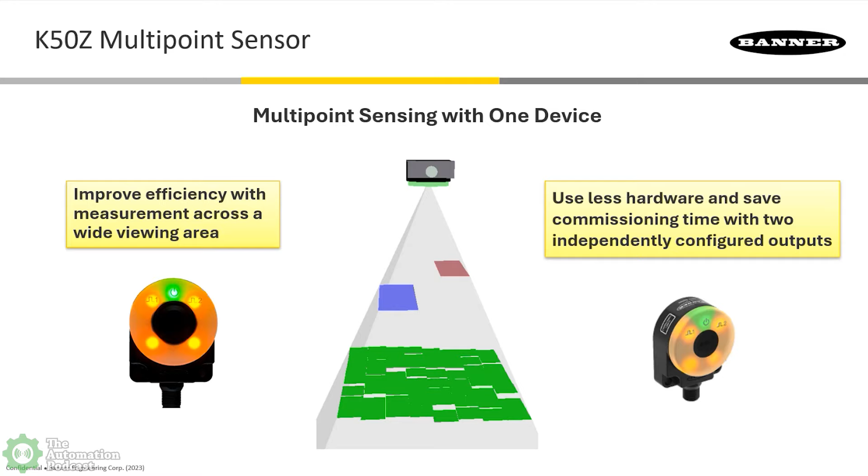No, I just think it's amazing that you can choose any zone in that 8x8 area to look at how far away different things are. Very cool. Yeah, and that area is quite large.

Being able to select zones is definitely one of the key features, but also the fact that it's 45 by 45 degrees coming out of the sensor face out to 2 meters. So you end up with about a 1.6 meter by 1.6 meter cross-sectional area at the furthest distance. So you have a really, really wide view depending on what your targets may be.

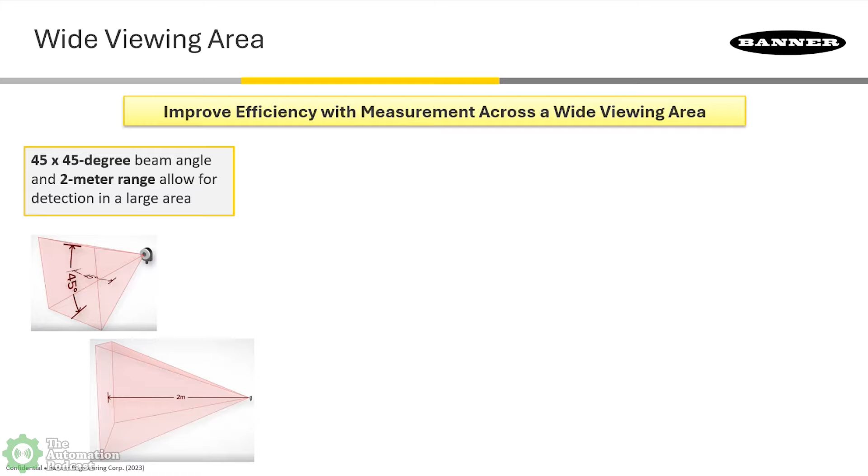In some cases, we've seen the sensor used in filling scenarios where the user wants to monitor the entire contents of a bin, or cart placement where a cart might not be positioned in the same area every single time, or placement of an object where if you're using a single laser or a single ultrasonic sensor, perhaps that detection would be missed. The measurement points as well - the 64 points.

Getting into the grid a little bit before I show too much in the presentation - how the sensor works is it emits an infrared laser out from the face in that large beam angle, and then it waits for a reading back on each individual pixel on an 8x8 imaging component.

Each one of those pixels has an associated distance measurement and an amplitude measurement. The sensor takes those and internalizes them and produces outputs that you as a user, whether it's controls or operations or retrofitting a process or speccing out a new process, can determine where you want the sensor to look. So while we have these 64 points, we provide back useful simplified measurements, and we don't necessarily need to use all 64, but we have the ability to use them.

And lastly, with it being time of flight, it's very resilient to things like an angle of a target. So you won't have signal bounce away off into nothingness as a certain item is presented to the sensor, placed in front of the sensor, like you would have with an ultrasonic. And the pixel density that we have is very reliable in seeing items that would otherwise be difficult to detect.

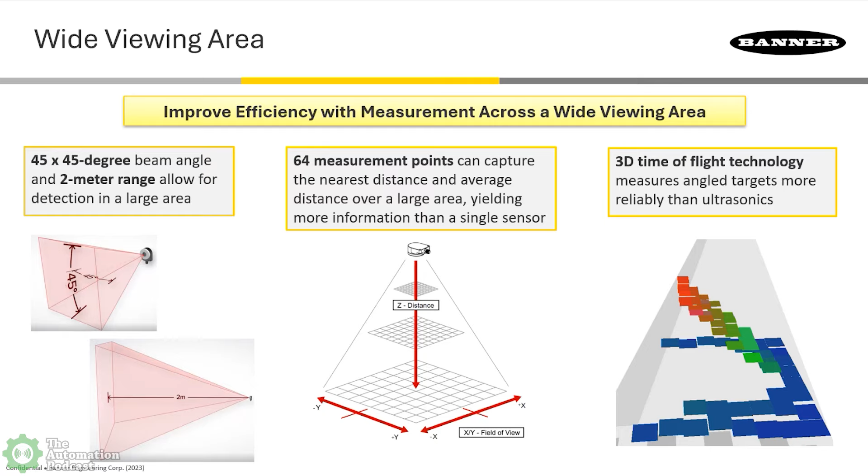Yeah, and actually, they're really well-timed questions, because it segues into this next slide I have. And so when you take into consideration that wide area, there's a lot of data we can access and then tell the sensor to process it one way or another. The fact that we have two outputs and are able to decouple them and have them sense different areas or measure different things is really, really powerful. It sounds exciting when you first hear it, but when you watch it go into an application like you just described, it becomes apparent how much value and how powerful such a small, straightforward, compact sensor can be.

So what this image is showing on the screen is a 3D representation of the sensor and a basic representation of the field of view, partitioned into a left side and a right side, a red side and a blue side. It shows that really what we could tell the sensor to do is focus on a left or a right side. And my mind goes to what applications could that be?

Well, like you said, if I had a bin or a filling application, and at the fill location you get mounding or something, whether it's boxes or other materials, or parts or metal shavings, whatever it may be, they'll accumulate faster in one zone than they will in the bulk of the bin. Being able to monitor those two areas independently - both the fill area where it accumulates faster, as well as the entire area to monitor a true fill level, which we do through an average height measurement - is useful because it gives you the information of whether the area is full or not, as well as whether action needs to be taken to shake a container, or an operator needs to stop by, or some other action needs to happen so that the fill operation can continue uninterrupted.

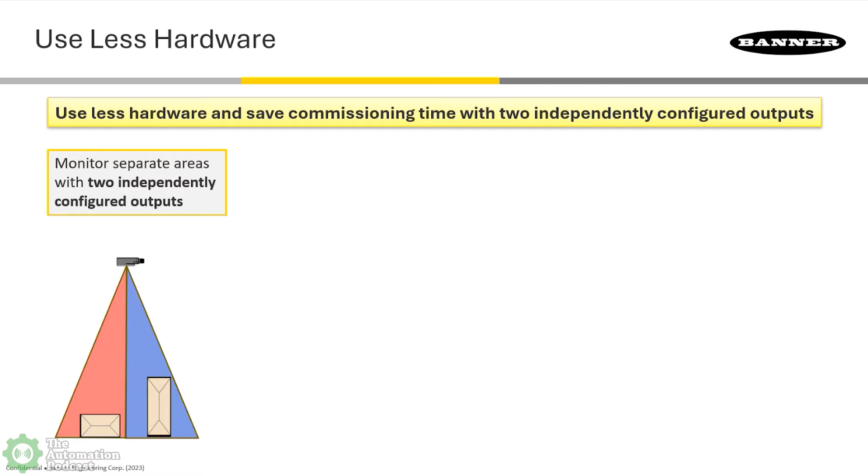So yeah, very powerful. And that configuration isn't limited to just a left and right zone. With the 64 different points present in the sensor, we can selectively go in and turn pixels on or off. The sensor will understand that and use that, and it's very straightforward and intuitive with the software that's free for download from the Banner website.

Really, it's a point and click functionality to set up the different zones. So in the image I have on the screen here, it's two 8x8 grids, each one represents zone 1 and zone 2. I'm telling the sensor to look at a blue zone that has a K and a Z in it, and then a red zone that has a 5 and a 0 in it. So the sensor would selectively only use those pixels for each respective output when making its measurements.

So not just a left and right or a front and back, but truly a very customizable, user configurable sensor to really fine tune it for what the application may be. And I think what's interesting is the fact that you can have the same pixel in both zones, because the KZ and the 50 kind of overlap. They do, yep. They're totally independent of one another, so that doesn't mean they have to be exclusive to pixels. You could have them use the same data.

So you could honestly overlap the two zones completely and measure an average height and a nearest distance, or an overall distance and a nearest distance. So you could get two pieces of information from the same measurement area, and that's just a different application of the two outputs.

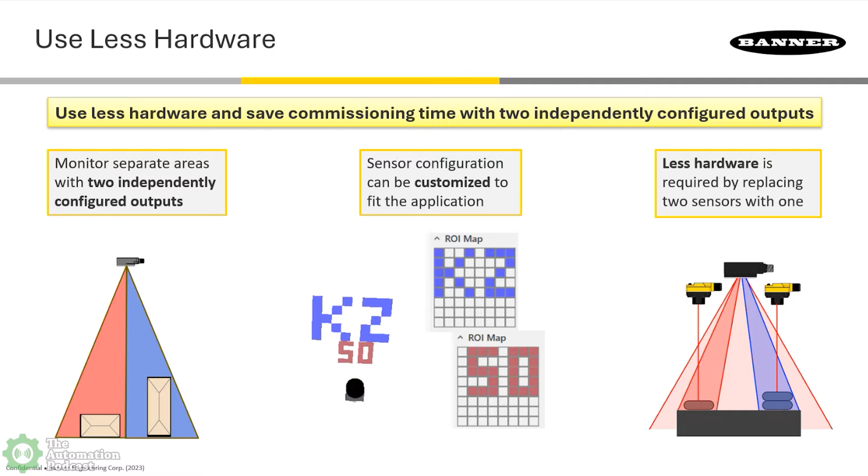Okay, so those are the core presentation slides that I wanted to show, really just highlighting the wide viewing area and the fact that we can customize the sensor so holistically that you can really tailor it to whatever it is that you're inspecting or the area that you're inspecting. And I do have some slides on the software as well, which we can do a live demo of, and I'll talk through it as best I can for anybody who's just listening versus watching the video. But we did develop a software interface just for this sensor, so it's brand new.

It's based on a platform that we use with some of our other products, our radars, and our newest released radar, the Q90R and Q90R2, also uses that same software package. But the K50Z has its own environment and look and feel.

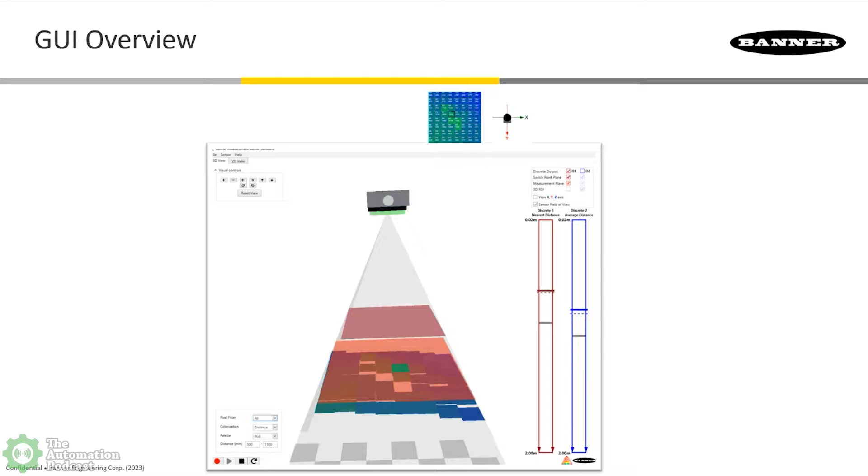Like I said earlier in this discussion, it's very intuitive - feedback we've gotten from all walks of industry, whether engineers, operators, test subjects during development, or internal people, has all been that it's intuitive and easy to use for the amount of data you're getting back from the sensor.

So just some callouts here before I bring up the live demo: we have a 3D area in the center of the screen that we call the observation space. With a 3D sensor, it's more difficult to conceptualize without visually seeing something like this, what the sensor is actually viewing. This gives us a good view into how the sensor is seeing what it's pointed at.

It makes it much easier to configure the zones for sensing in specific areas. We've got a controls interface, and for people out in the field configuring sensors, this was a feature we added specifically for when you're on the floor at a machine, at a sensor, and don't have a mouse readily available. I've been in that situation before, so we got a lot of feedback on that.

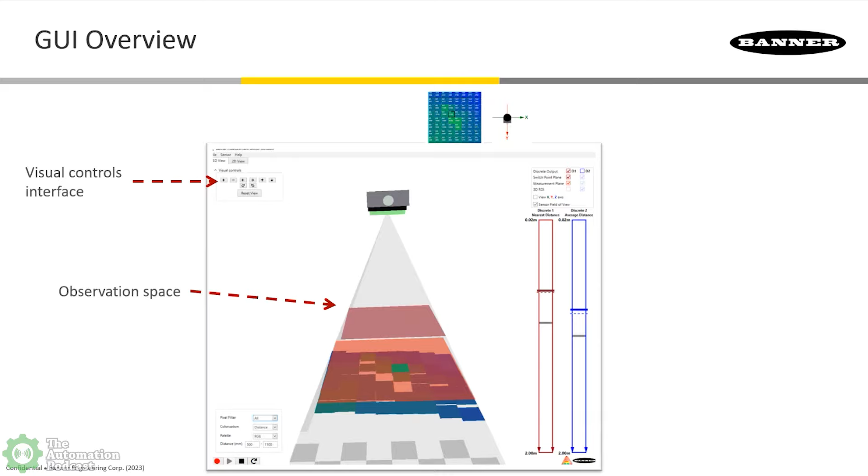So you can navigate around in that space with buttons, versus having to rely on your trackpad to drag and drop and click to rotate that 3D image around.

We've got a few different filters for displaying the actual point cloud itself and colorization depending on distance or excess gain being received by the sensor. There are different display options for how the measurements are being represented.

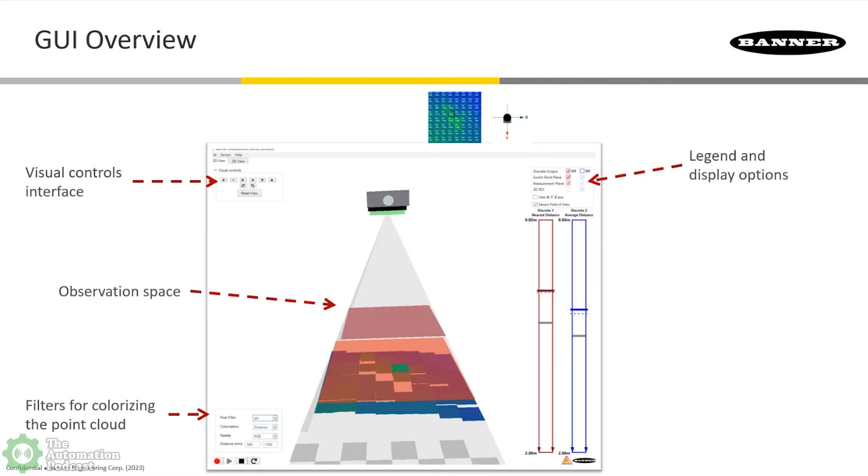Bar graphs, if you'd rather look at the measurement in terms of where your switch point is located and where the measurement is actually occurring. And then the 3D or 2D view - you can either look at the pixel by pixel data as it's coming in, or look in the 3D space and see what the sensor's seeing.

I suppose I haven't mentioned it yet, but now that we're talking about outputs and switch points, the sensor is IO-Link enabled. We provide two discrete outputs alongside that, as well as the ability to pull the measurement data over IO-Link for both discrete output 1 and discrete output 2.

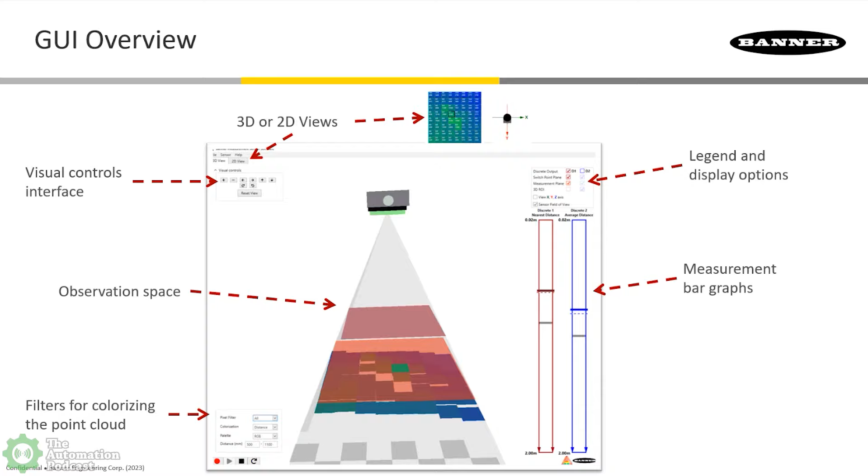So you could either use those as simple discrete signals, or you can make more informed decisions in the PLC using IO-Link and the actual measured value.

Measurement modes - the two modes the sensor can function in are nearest distance and average distance. I wanted to highlight these before pulling up the software itself. What you're seeing is two side-by-side images of the same thing, and the only difference is what measurement mode the sensor's in.

On the left side, you'll see a translucent red plane that's high. On the right side, there's a translucent red plane that's low. I've called out the target with arrows, as well as the floor with arrows. This was just an object I had for testing, placed underneath the sensor, then made measurements on it.

We have this dark red area that we call a switch point plane, and that's fixed in space - it's the distance away from the sensor where your output would either turn on or off. The measurement plane is the translucent red plane, and that moves with the measurement through the 3D area.

In nearest distance mode, the sensor is tracking the closest thing it sees - the pixel closest to the sensor face - and we're reporting back the distance from sensor to the nearest pixel or nearest target. In average distance, the sensor takes all of the data being brought in and averages out the measurement, which is why our measurement plane is now in between the highest and lowest pixels, or the nearest and farthest away pixels.

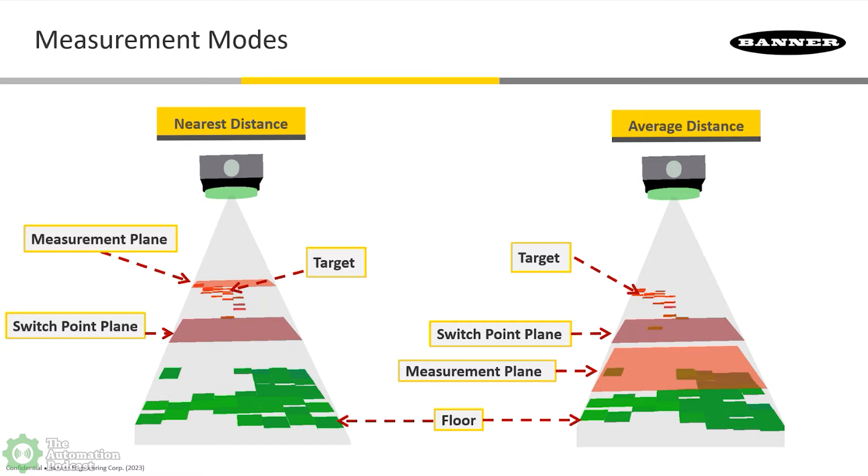I think that slide does, and you did a really good job explaining those two different modes: nearest and average. Nearest would be for just basic detection. Average, think of like you could use it for fill or for accumulation, any sort of application like that.

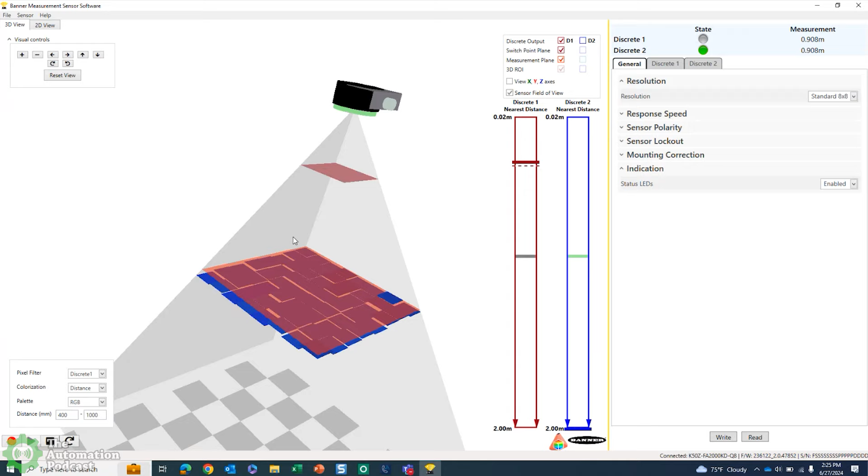So let's go to the software. What we have here is a live sensor that's right next to me right now, just looking at the floor. I'm just going to slowly rotate it around with my mouse, and you can see that we show the entire field of view that the sensor can see, as well as the measurements that are actively being made.

You can see the 64 different measurement points that are coming back from the floor, as well as my switch point plane that's up in the top field of view from the sensor. So it represents quite well visually.

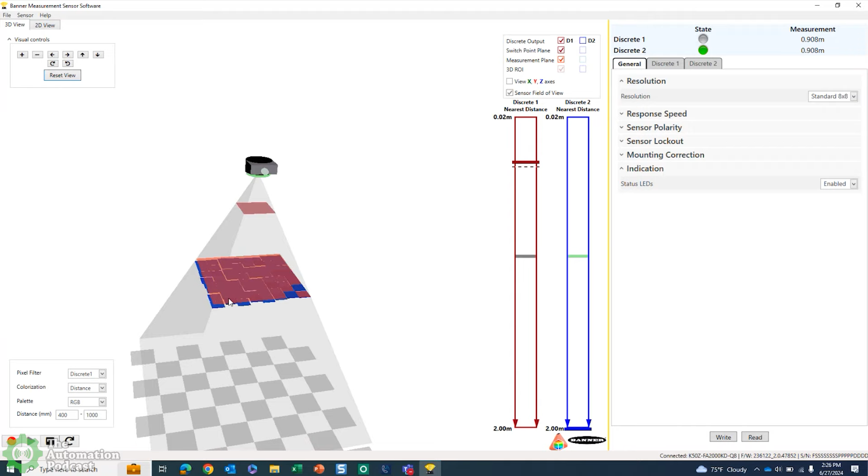And again, the buttons here—it may sound silly to call such attention to buttons, but if you've been out in the field with a sensor that is easier to configure with a mouse and you're trying to use a trackpad, having something like this is incredibly useful, especially having a reset view where you can go to a home position in case you ever get lost in 3D space.

So I'll just kind of walk through some of the exciting, unique features that make it easy to configure, starting with these visualization options up in the top right-hand side of the screen. So I have a discrete output, a switch point plane, and measurement plane, and I have red for discrete 1 and blue for discrete 2, so I can selectively turn on and off a switch point.

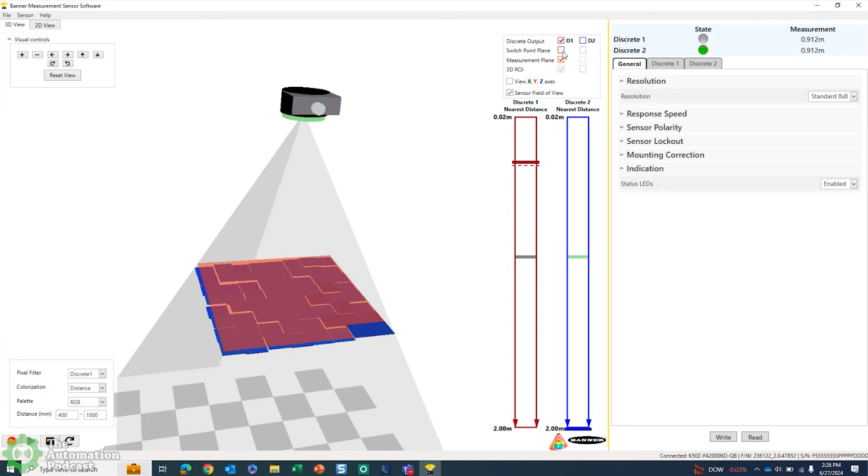I can turn on and off my measurement plane. I can view an axis, so I can see where my X, Y, and Z coordinate system is. And then I can turn on and off the field of view if I'm not interested in having that gray background. The bar graphs themselves align with the sensor.

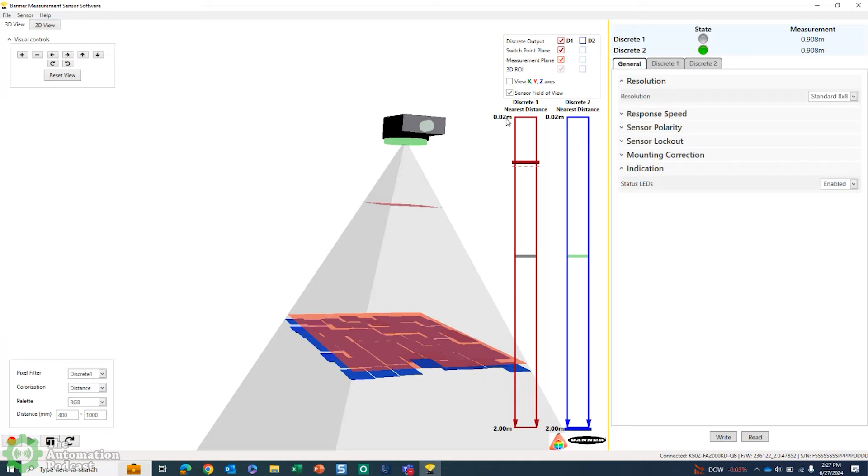So if I just position it right next to the bar graph, you'll see it measures from the 20 millimeter dead zone, so a very short dead zone, out to 2 meters. And then I can actually change my switch point just by dragging and dropping the switch point on the bar graph. So that'll actively change where my output would change or turn on or off if I were to introduce a target like my hand coming into the field of view.

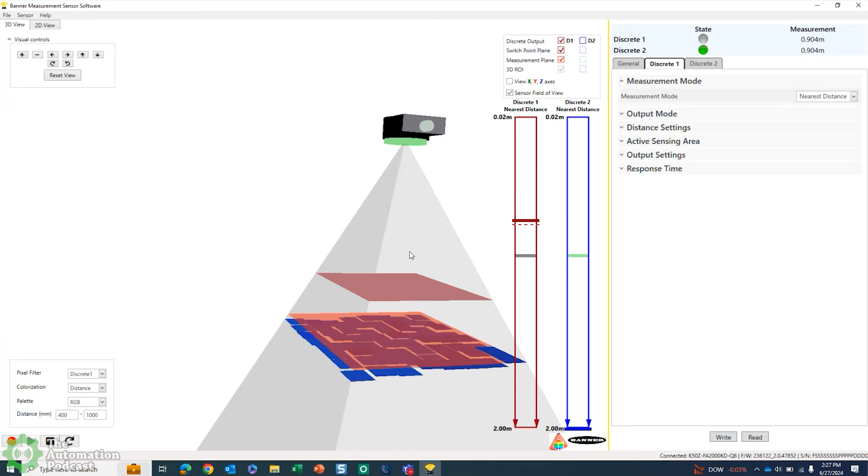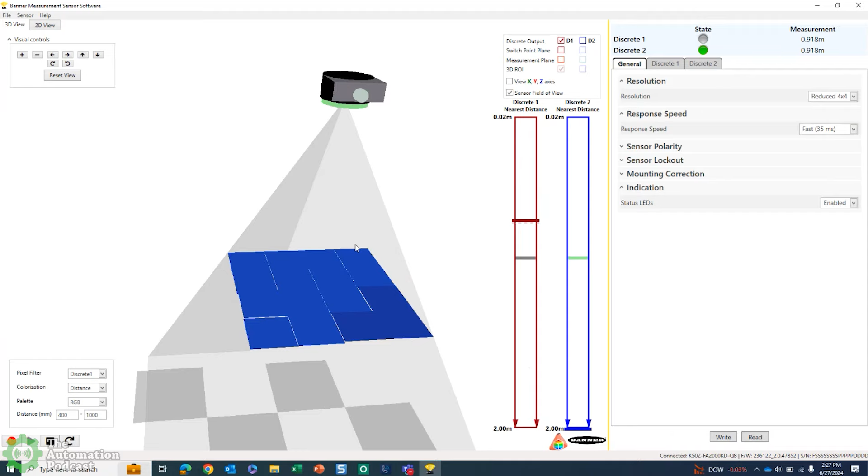So for visualization, we allow a lot of flexibility. Several different response speeds—fast, medium, or slow—as well as the option to reduce the resolution of the sensor itself. So instead of 8x8, I can force it down to a 4x4, and I pick up a lot of response speed by doing that.

So an interesting feature as well if you need to operate faster than what some other 3D sensors may be able to do. So I'll go back to 8x8 because it's got the best visualization, the most information coming back.

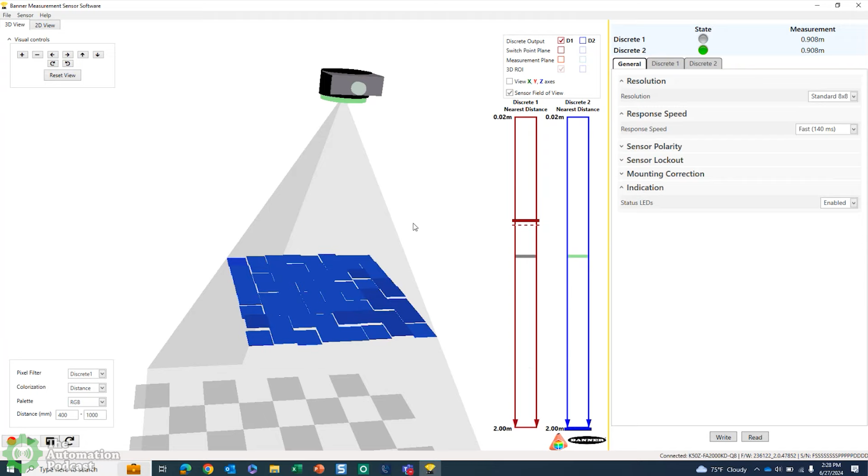Now, how are you connected to it? Are you connected via Ethernet or via USB? I am connected via a USB communication device. We call it our ProKit cable. It's a cable that you would use to configure our radars, our smart lights, our Pulse Pro PFM controlled lighting products, and a few other items from our brand that have configurability. So it's a configuration element that's available on our website. But you could also do some basic configuration through IO-Link. The most configuration you're going to have is through the software interface here.

Let's go into some of the more exciting things. Obviously, we've got some standard features that are present in most sensors, right? Sensor polarity, sensor lockout. This is unique to a 3D sensor where I can actually control the pitch, roll, and yaw and account for angular mounting.

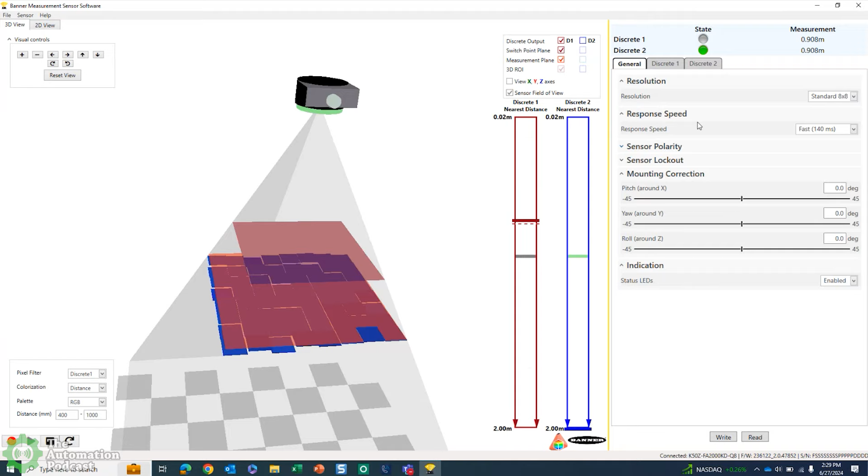So if I'm offset by 10 degrees in a certain direction, or I have to mount to the side of a target area, I can actually have the sensor automatically adjust for those angles that it's mounted at and interpret the data as if it were straight above it. So interesting—that's a very interesting feature set there.

The best showcase of this functionality from the sensor is getting into what we call the active sensing area. What I'm going to start with is the 2D ROI, which is that pixel by pixel ability to cut out certain things.

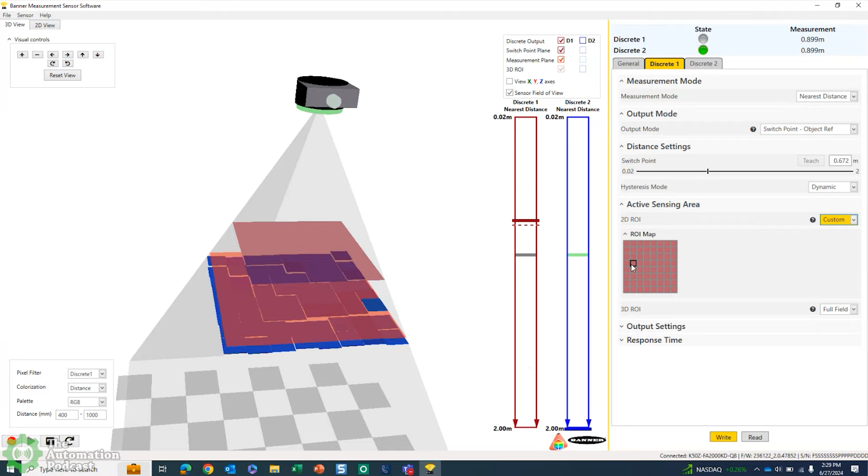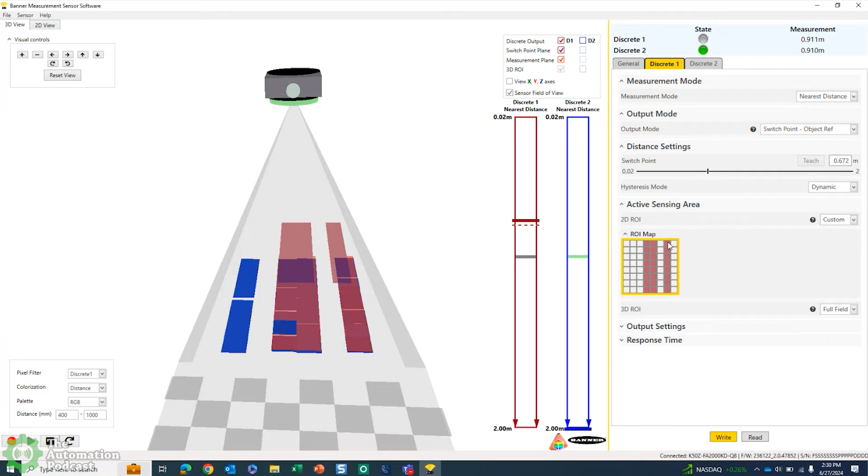As you can see here, I've got an 8x8 grid of red pixels. I can go in and turn off certain pixels one by one or in groups. In this interesting orientation, now I'm measuring 3 stripes, one thick in the middle, and I can turn off those outer stripes, so now I'm only measuring a thin stripe down the center of the sensor and ignoring the data around it.

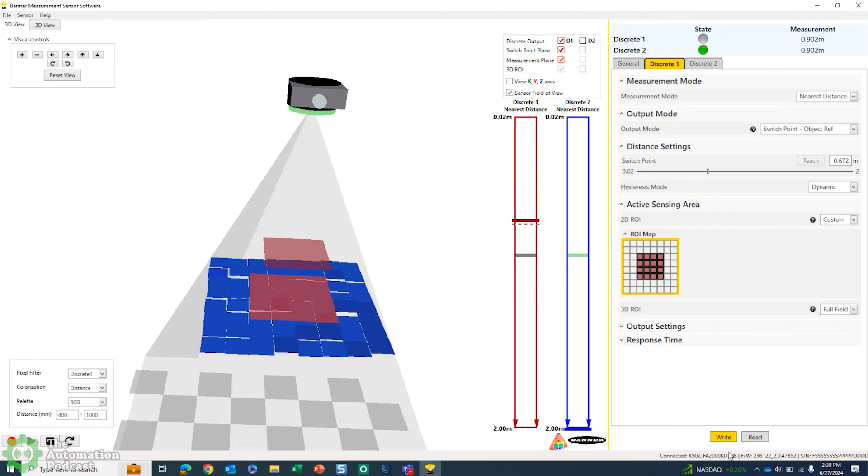So if I were focusing on a bin, or on top of a table, and I had this large area that I wanted to cover, but this field of view is a bit too large, I can only turn on the middle portion of the pixels, and now I'm inspecting just this middle 4x4 section instead of the entire 8x8 field of view.

A good way to show it is bringing all the data back. As you watch, I'm going to bring my hand back into the screen. You should see some pixels show up right here, and my measurement plane doesn't change at all until I cross into that area where I have active pixels actually sensing.

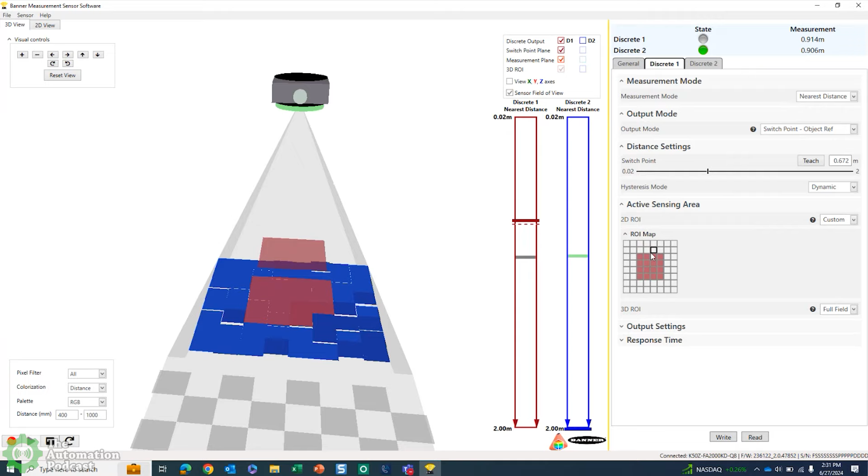So that's one way to constrain the data. If you had perhaps a pole or a beam or something that you needed to ignore as well, you can selectively cut out specific areas to ignore. It gives you really good configurability to avoid some of those problems you might find out in an industrial environment, and when you're retrofitting into a process or speccing out a new one, it gives you flexibility in how you're going to implement and mount the sensor.

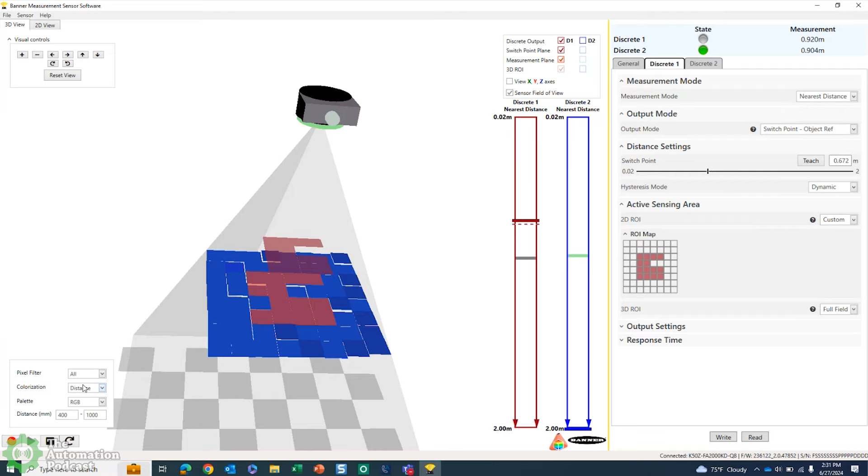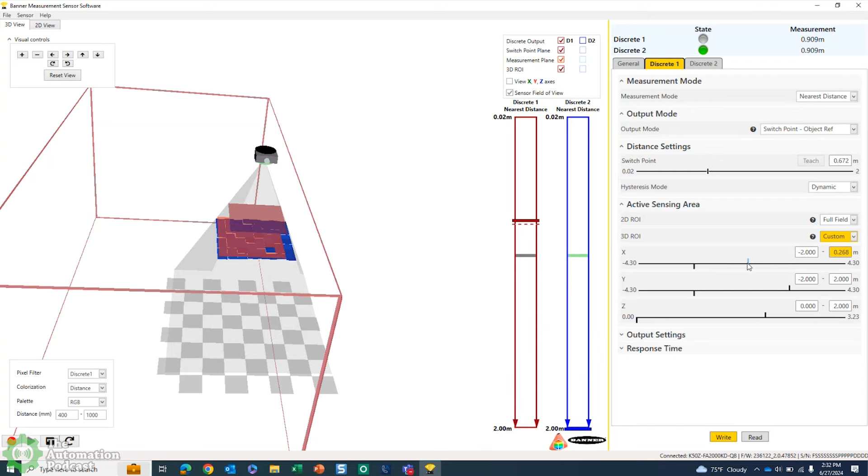The other way that we have to configure that 3D sensing area is with a 3D ROI instead of a 2D ROI. Now you can see I have a large box on the screen. I can either drag and drop or type in actual measurements directly, and then trim out an area of inspection just by telling the sensor an X, Y, and Z coordinate system. So now I'm inspecting basically a chute directly from the sensor face down to the max distance.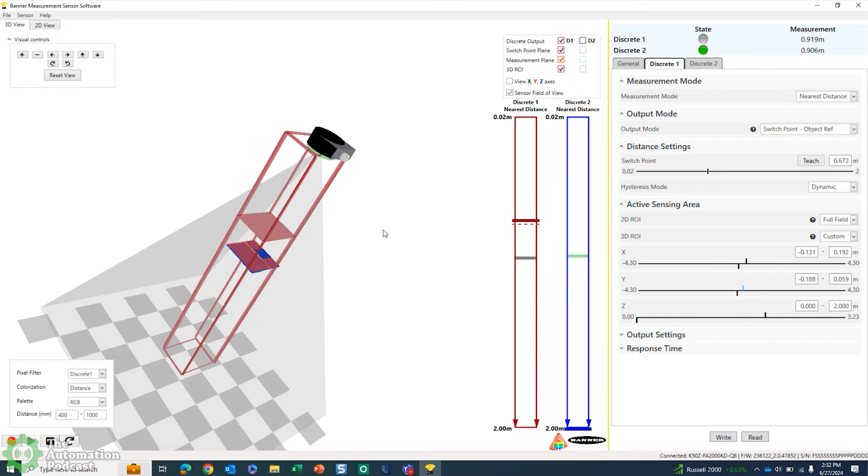So now, can I tell it to ignore anything that gets very close to it? Yep. Like you did the left and right sides, can I do the top and bottom? Let's say there's something that goes between the sensor, some kind of chain that occasionally goes by the front of the sensor, and I want to ignore that, like a blade of a fan or something. Can I tell it not to give any results on that?

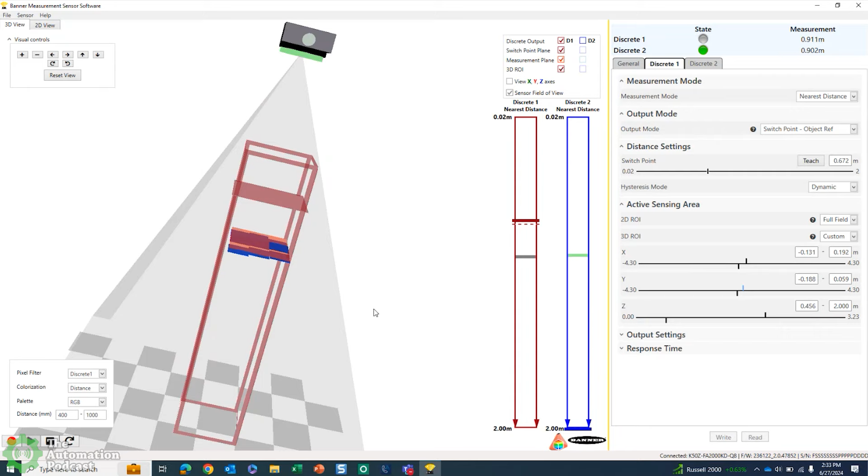Yep, you can. So we started at 0, and as I slowly bring that value up, now anything above just about 0.5 meters, the sensor will ignore. So I'm going to wave my hand in front of it. You'll probably see the measurement disappear because there's nothing happening. What's happening is you can see my hand is up here being detected, but it's not including those in the measurement because they fall outside my 3D area.

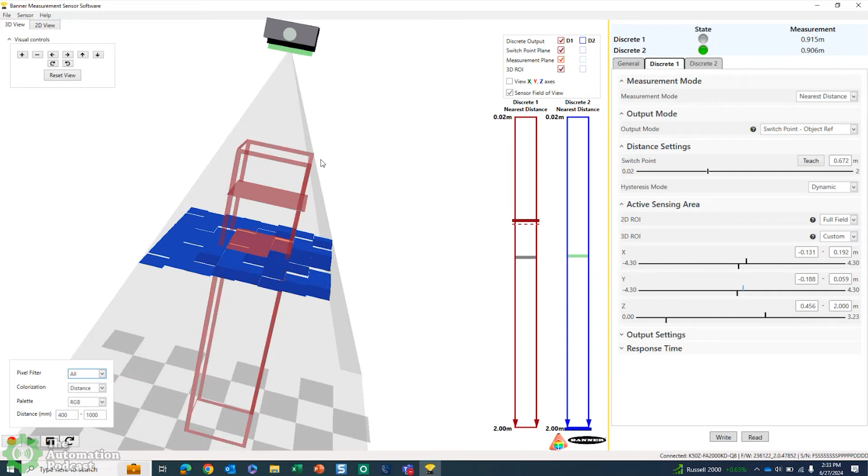That's awesome. Is that a common thing you've seen before, trying to ignore fan blades or something? I can see that being a pain point, like if it would only do this. Yeah, so sure, we have total flexibility to ignore targets too far away or too close to the sensor.

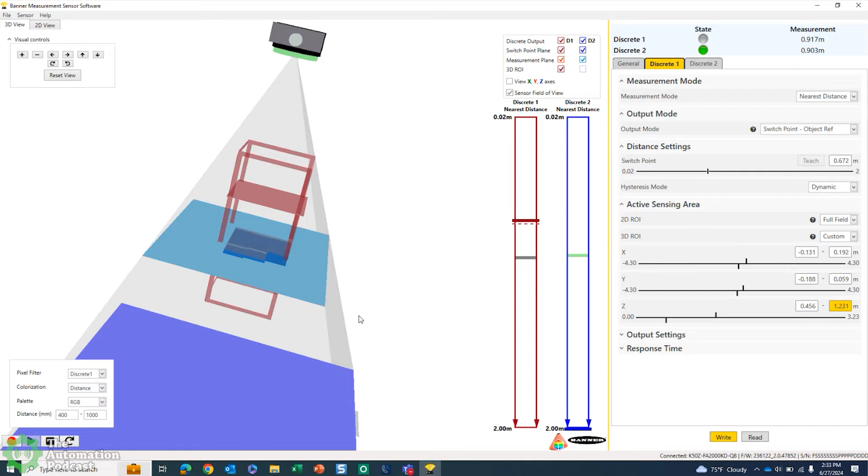And then, after you configure one zone the way you want it, we have a completely second zone that can be configured in a similar fashion to the first one, but you could set it up in a different way. So rather than having a shoot down the center of the screen, maybe I have my zone 2 looking on the left side of the field of view for whatever reason.

I have flexibility to control where I'm looking with each independent output. And then I can receive a measurement back directly over IO link, whether it's the average height or the nearest, or average distance or nearest distance, whatever I tell the sensor that I want to measure.

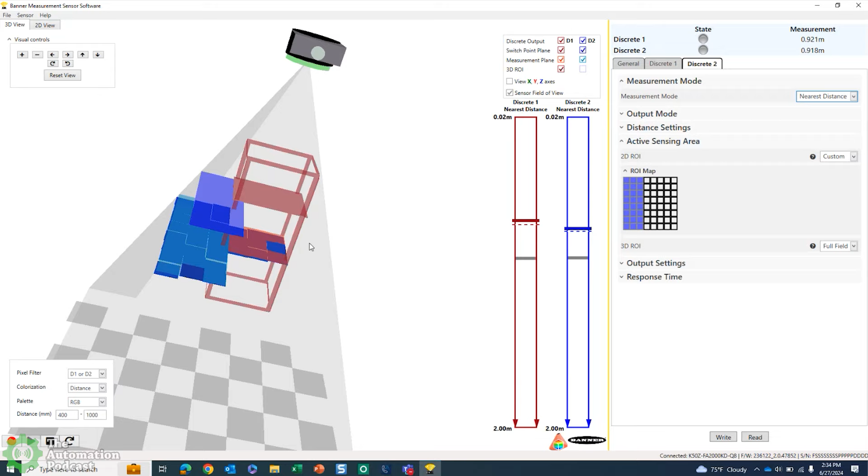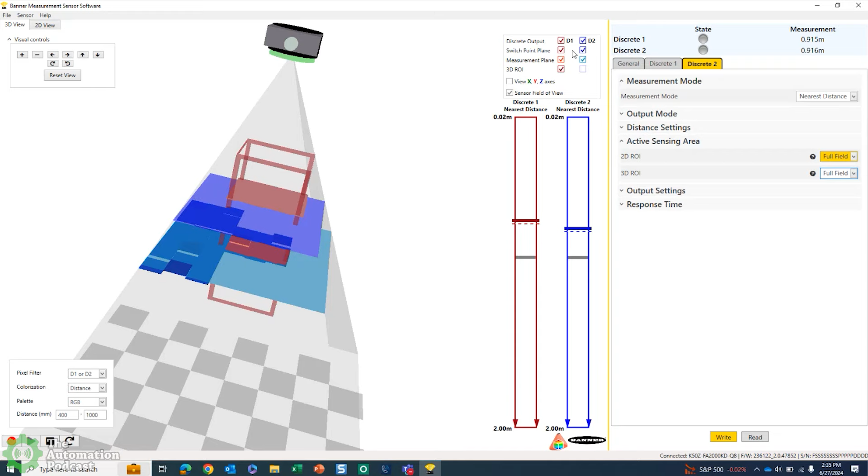For those watching, the software, being able to see this live and see things coming in front of it, actually seeing your zones and everything, makes the software so intuitive and easy to know you're setting it up the way you wanted. Versus if you just added all these settings and maybe had a scratch pad trying to keep track of it, it's not the same as seeing it live. This would be great to validate your settings when you start running production. You can say, okay, let's see if I set it up correctly, maybe I forgot something, maybe I need to go deeper or wider.

I love how it's just this live streaming update of all 64 pixels, if you have it set up for that many.

Really the goal of the software and the goal of the sensor is to provide access to 3D information and 3D data in an easy to consume, intuitive way, and really try to lower the barrier of entry to getting that kind of data out of a sensor.

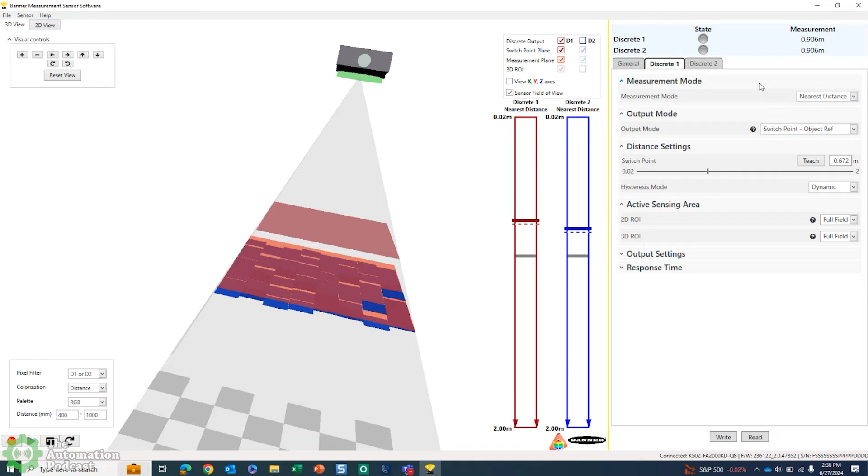I don't know if we typically talk about prices on this podcast, but the list price of the unit is $545, which for access to this kind of data and this configurability, where I can set up all the configuration parameters of a 3D device in a handful of settings on one screen, I think it's a great value to a lot of users. Yeah, I have to agree with you, that is a great price.

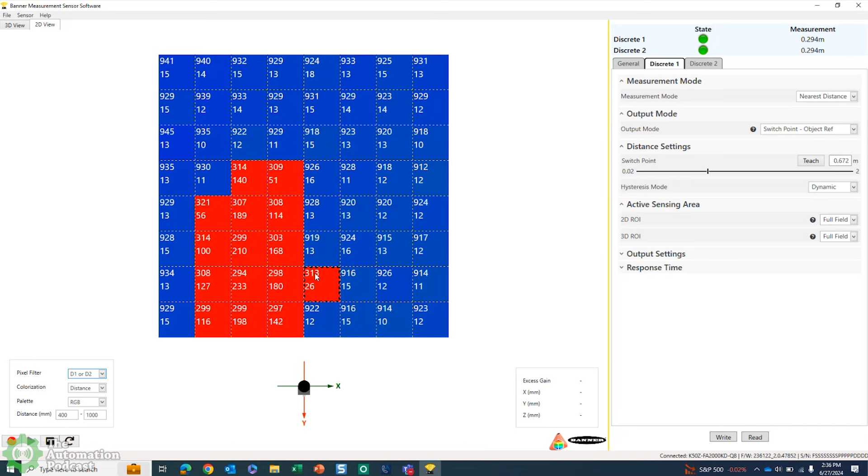So one last view that I'll show here is a 2D view versus a 3D view. If you wanted to inspect this very specific pixel, I'll wave my hand one more time and you can watch it start to cross the field of view. This helps for troubleshooting or for configuration as well. Say that's a beam blocking my field of view, now I can pick which pixels I'd want to ignore very selectively. So I've got a good guide to follow now of which ones I should ignore and which ones I should bring into the measurement.

In a lot of applications where there's not going to be a lot of height to your measuring, where it's going to be more pattern recognition, or checking that stuff is in the right place, I can see that 2D being much easier to see than the 3D. Yep, and it's simpler on the eyes too, but I still like the 3D.

As I said, we try to provide straightforward, intuitive feedback to make configuration as simple as possible while still giving access to this data, and then having the outputs just be pre-processed. So we don't need any sort of controller as an accessory to this, we don't need any external lighting. Everything that's ever needed to run this sensor is on board. You set it up for the application, let it go, and it'll provide you the data you've configured it for, without any other instruments touching it, besides connections to the PLC and power, of course.

The applications we've seen have been immense. It seems like the versatility it provides allows it to succeed in many applications where historically it's either been difficult or required a long list of sensors needed to service one particular area. Shawn, have you seen that in your career, when a user is trying to measure a certain area and the best solution was several sensors all tied together, inspecting different locations for whatever the target may be? I've got some in mind, but I'm curious what you've seen from your experience, and then those types of applications kind of become a nuisance to program.

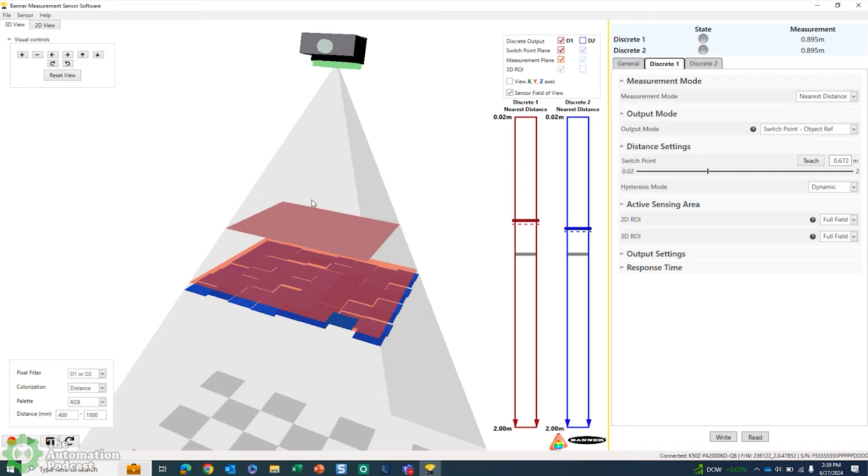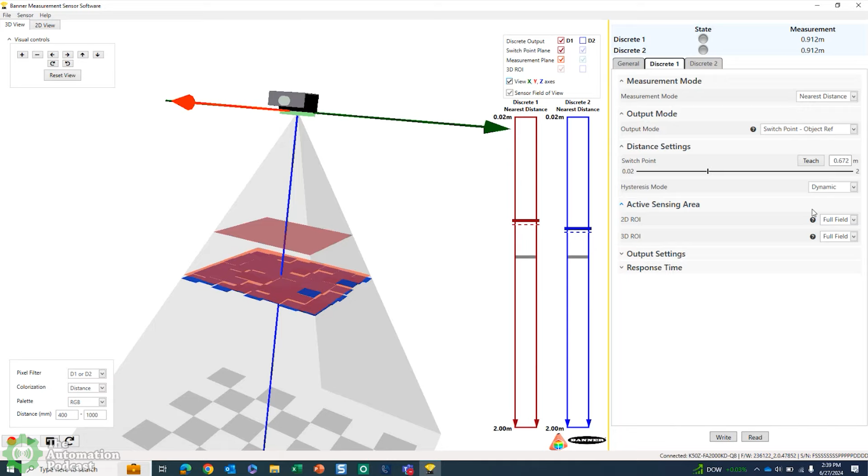So it's not only that you need all these sensors, which gets expensive, but what if one fails? Then on the programming side, it can be a mind teaser for the brain, but a lot of times it turns into tedium because you don't have a visual view. You're trying to imagine it and program it, and then things happen that you can't see. You end up building a data log somewhere else just to figure out how something got through all your different sensors and beams. I've seen people try to use light curtains for this, not as a safety light curtain, but where each beam gives you a difference. This just seems like it makes a lot of applications easier right out of the box.

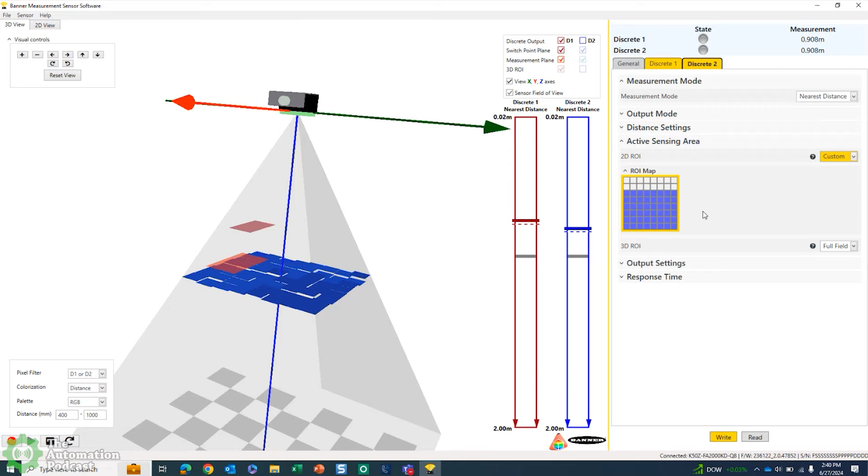But in any case, what were you thinking of, Alex? We had this great test where, as a pallet is being wrapped with clear packaging film, there's generally some mechanical element that spins around and applies the wrapping to the palletized items. That arm would go up or down depending on where it's already placed or needs to place wrapping. In our experience, several lasers were typically used to always detect that the pallet was present. As the arm moves, different angles are introduced to what the lasers are seeing, which necessitated several sensors mounted at different angles, so detection would never be lost on the bulk of the items.

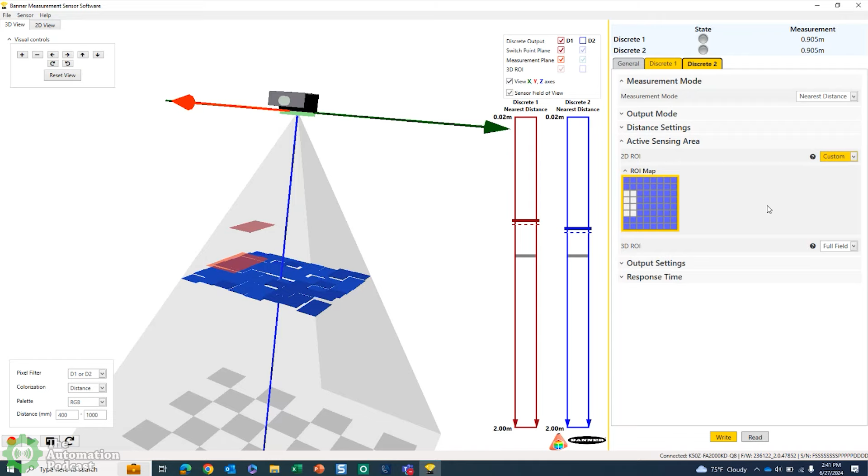And as more of the plastic is applied, different reflectivity becomes a question. So having several lasers ensures detection was never missed. If a single laser was there, there's a chance it shot off into nothing as the arm wrapped around.

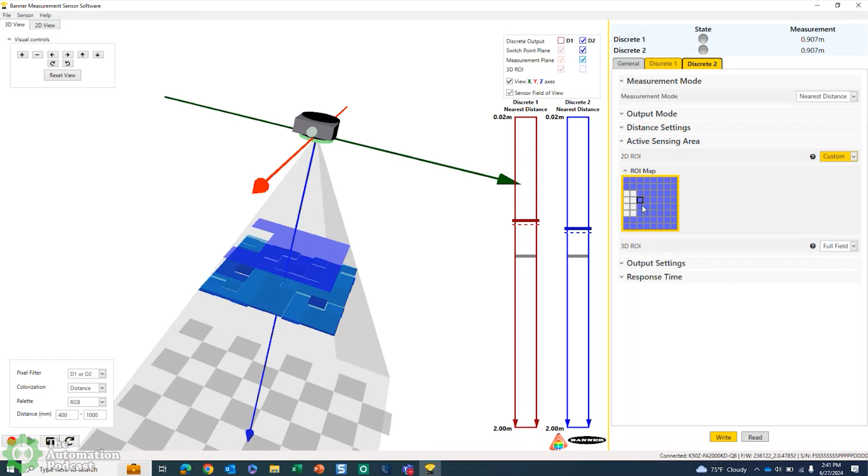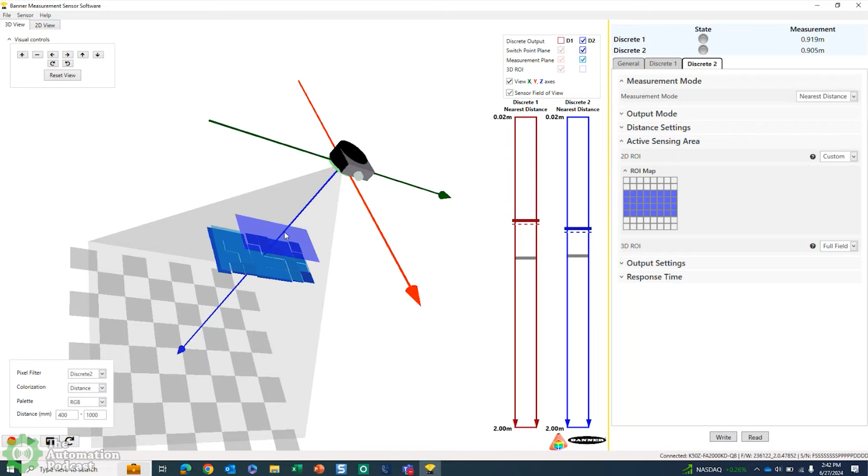So using the K50Z in place of several lasers as it was wrapping around the palletized items, we never lost detection. I'll show it on the screen here. All we used was this 2D ROI that I'm playing with at the moment, setting a band across the field of view. There were several lasers before, and all we did was replicate that banded area the application needed to see, detecting when the arm was too high wrapping around the pallet, so it should continue back down and keep wrapping. So we replaced several lasers with a horizontal K50Z doing detection on a pallet as it wrapped around.

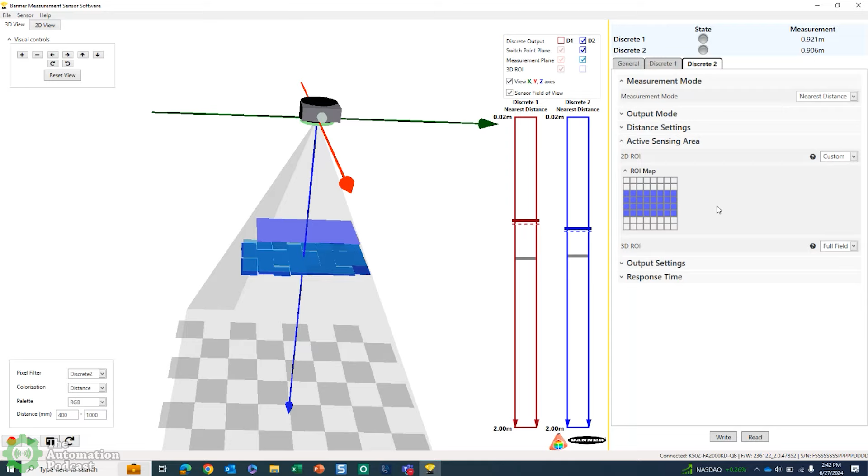Yeah, we've seen so many different applications with that sort of need, where it's been solved a certain way, but it might not be the most optimal way. We have a great opportunity here to provide the users, the audience, with a method of simplifying either current installations or new installations with the flexibility of measurement.

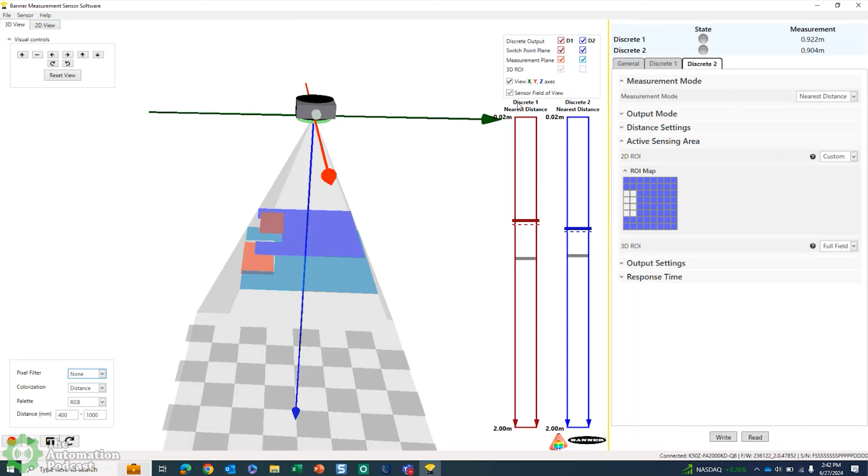Yeah, this is definitely one of those things. This unit and the programming cable, since the software's free, is something I think a lot of engineers are just going to want to have in their drawer. They're going to think, there are so many different places I can use this in the plant, I'll just keep one in my desk drawer so that when a new application comes up, I can run out there with it. I know people who do that with color sensors and other sensors too, to start working on the application and prove it out, do a proof of concept before placing the order.

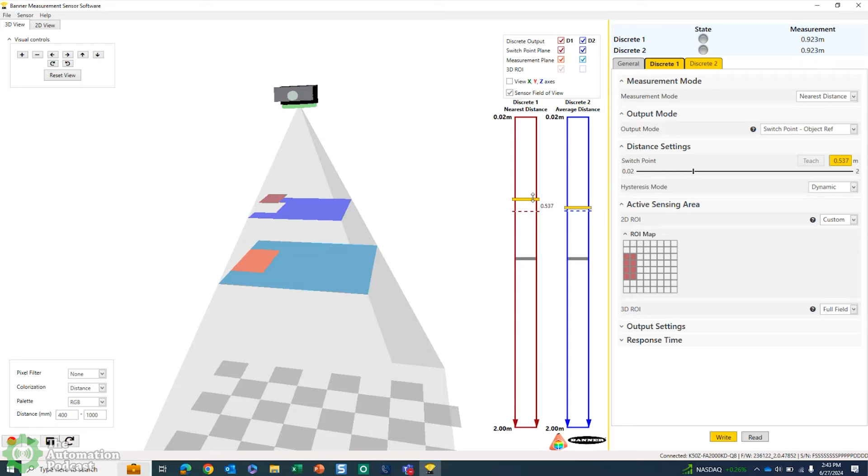I'd love to hear from the audience if you guys actually go out and get one of these, and what you use it on, because I'm stuck in the office these days, so I don't get to see what you guys are doing out there. Yeah, it's pretty amazing some of the applications that we find.

Are there any other questions you had that came up, Shawn, or discussion points, or anywhere else you think we should dive in a little bit more for people listening, or something I should expand upon? No, I think we covered it all.

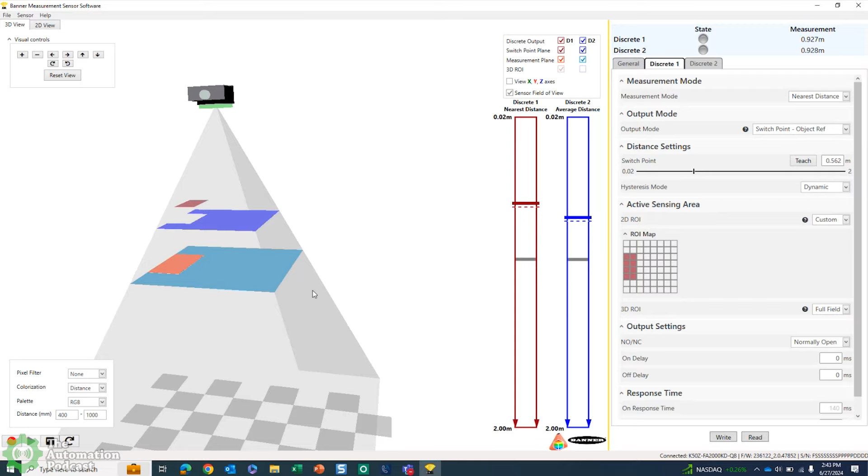I think probably the best bet would be to end on where they find out more information. Yeah, we always have lots of information on our website.